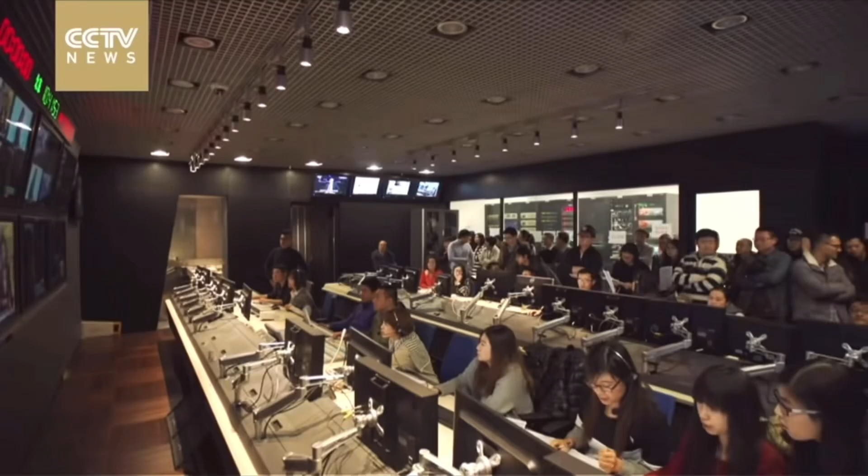This building is the headquarters of CCTV, China's main state-owned television broadcasting network, and is located in Beijing and includes administrative offices, newsrooms, broadcasting rooms, program production rooms, and studios.

At the time, Beijing was undergoing a massive urban redevelopment project ahead of the 2008 Olympic Games, which required a new landmark building. In addition, the existing CCTV headquarters was struggling to keep up with the latest broadcasting technology and efficient operations due to its aging facilities and remote space, and required a new headquarters that would incorporate the latest broadcasting technology, provide a variety of broadcast studios, and ample office space.

The project was therefore undertaken by Rem Koolhaas and his architectural firm OMA. Dutch architect Rem Koolhaas is one of the most influential architects in contemporary architecture, known for his innovative and experimental designs. His major works include the Seattle Central Library, Casa da Musica, and De Rotterdam.

His work often reflects a specific social and cultural context, and he believes that architecture should function as a social phenomenon, not just a building. These characteristics of the architect are also reflected in the CCTV headquarters.

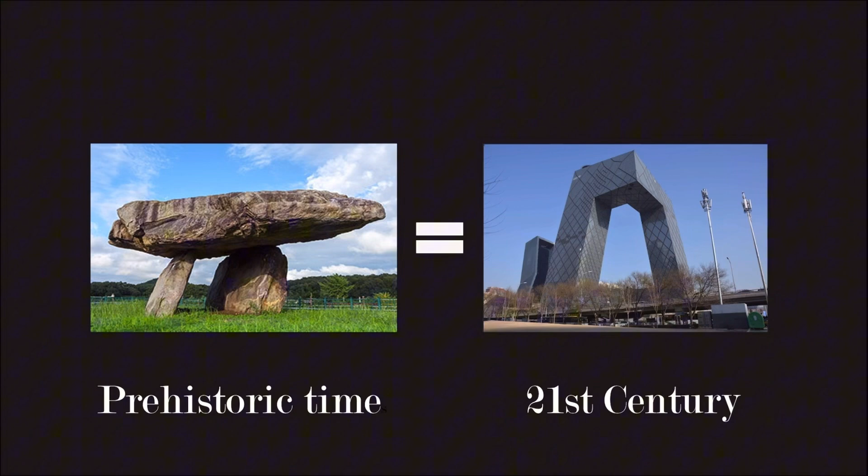The construction of a dolmen required a great deal of labor, and the larger the dolmen, the greater the authority and power of the group. With the CCTV headquarters building, Rem Koolhaas wanted to show the world that China had emerged as a world power through the Beijing Olympics.

And instead of competing for ultimate height and style within a traditional two-dimensional tower that soars toward the sky, CCTV's loop provides a truly three-dimensional experience, culminating in a 75-meter cantilever.

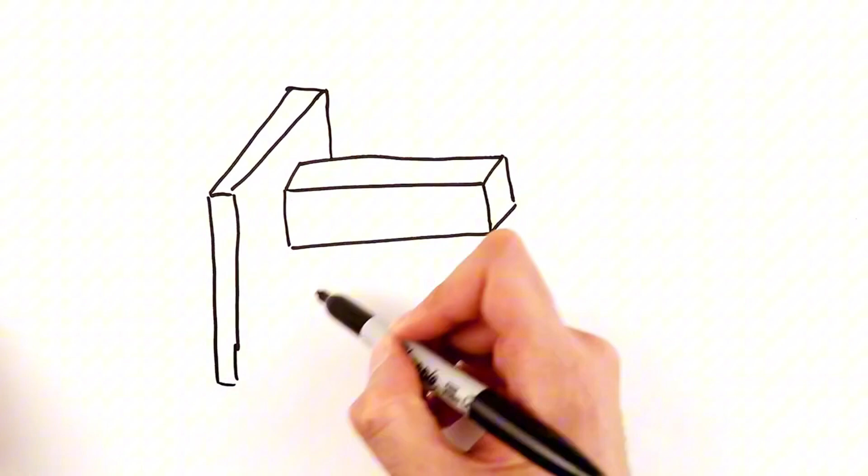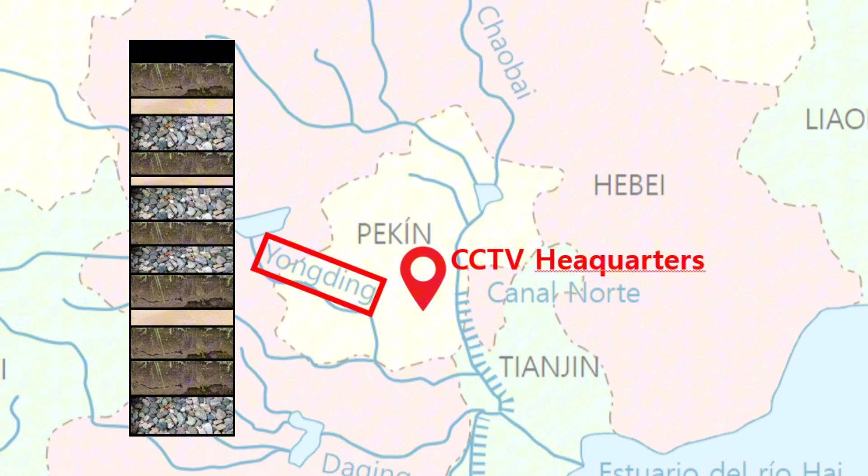However, due to this unique design, structural instability caused by the concentration of loads at one end has to be addressed. In addition, CCTV is located in the central business district of Chaoyang District, Beijing, China, which is located in the middle and lower reaches of the Yongding River, which has weak soils and uneven ground.

Consequently, a piled raft foundation was chosen, followed by the bottom-up construction method, starting from the underground structures and progressing upwards. The process began with a soil investigation to evaluate the ground conditions and determine the optimal locations and depth for the piles. Once this assessment was complete, excavation commenced to reach the necessary depth for a stable foundation.

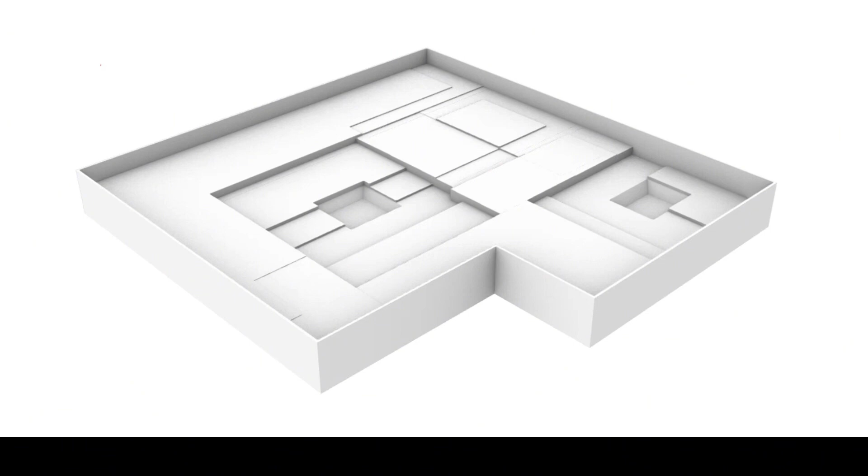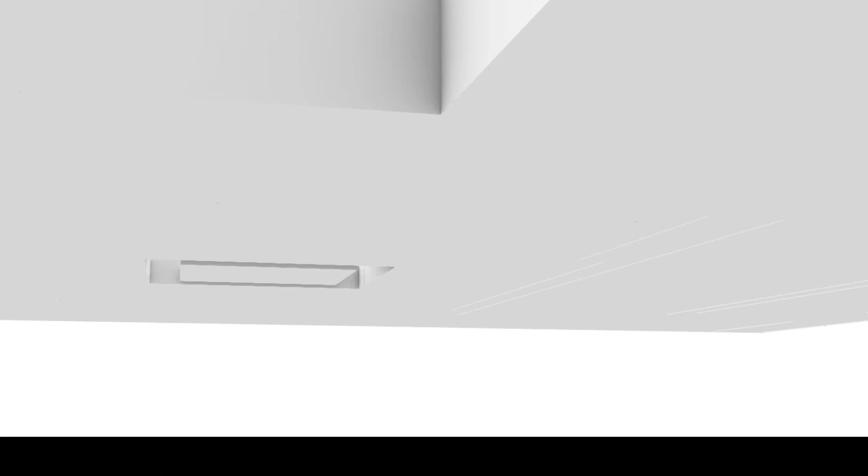During excavation, diaphragm walls were installed to prevent soil collapse and ensure stability. Upon completion of the excavation, piles with a diameter of 1.2 meters and a length of 52 meters were driven into the ground. These piles served to transfer the building's load to deeper, more stable soil layers.

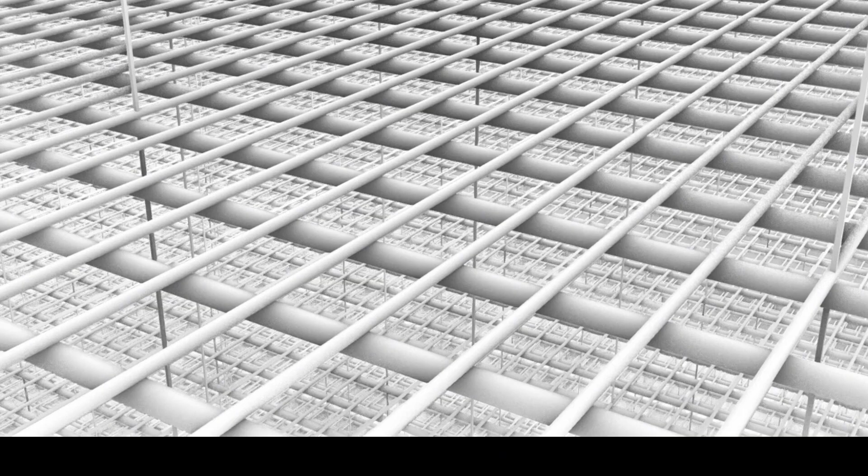Following the pile installation, the raft foundation was constructed atop the piles. The raft foundation works in conjunction with the piles to evenly distribute the entire building loads, mitigating the risk of punching shear failure, which could occur if only piles were used due to their small cross-section area.

After installing the piles, rebar was placed in the raft foundation and concrete was poured. HRB 500 grade rebar was used for the raft, with the lower section reinforced with 2 to 7 layers of mesh and the upper section with 2 to 3 layers of mesh.

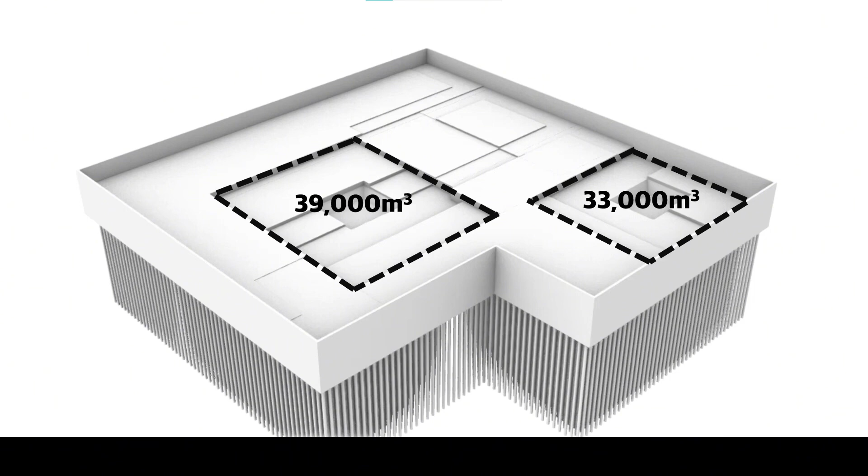The concrete pouring for Tower 1 took 52 hours with a total volume of 39,000 cubic meters. For Tower 2, the concrete pouring took 54 hours with a total volume of 33,000 cubic meters. The total volume of concrete poured for the base plate exceeds 120,000 cubic meters.

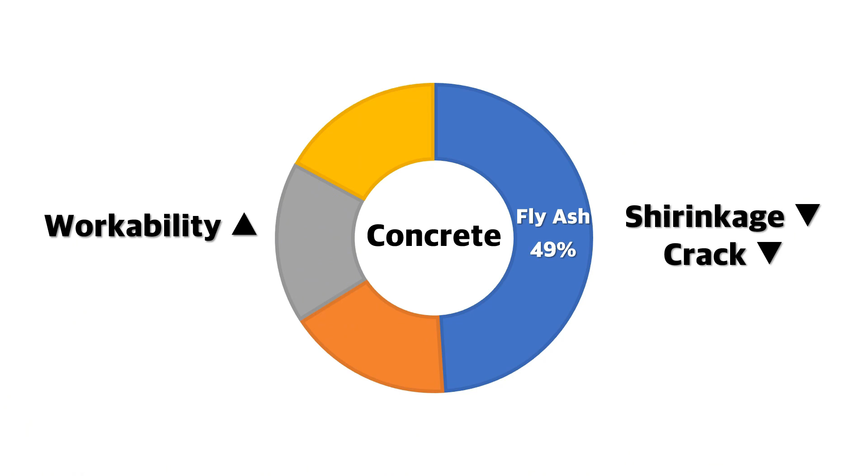During the massive concrete pouring process, crack control is the critical aspect. To address this, CCTV implemented two key methods. The first method involved increasing the proportion of fly ash in the concrete mix to 49%. Fly ash enhances the workability of concrete, reduces shrinkage, prevents shrinkage cracks, and lowers the heat of hydration, thus preventing temperature-induced cracking.

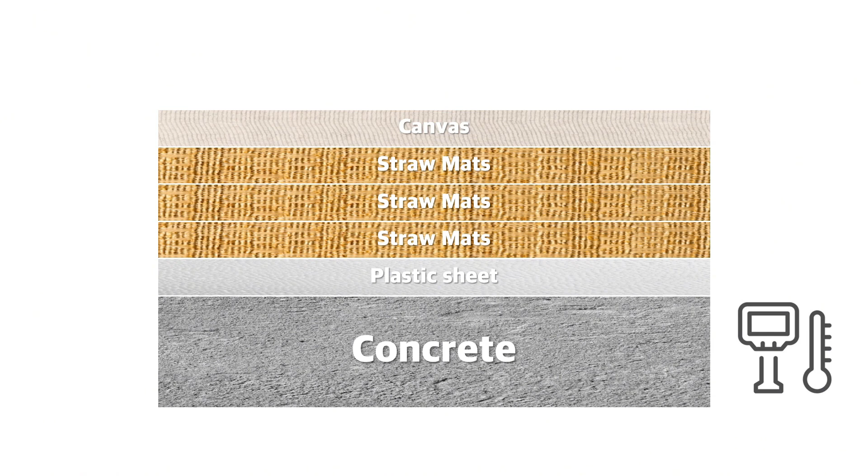The second method included using a combination of plastic sheets, 3 layers of straw mats, and 1 layer of canvas for insulation and maintenance. Additionally, a large capacity concrete computer temperature monitoring system was employed to measure the temperature in real time.

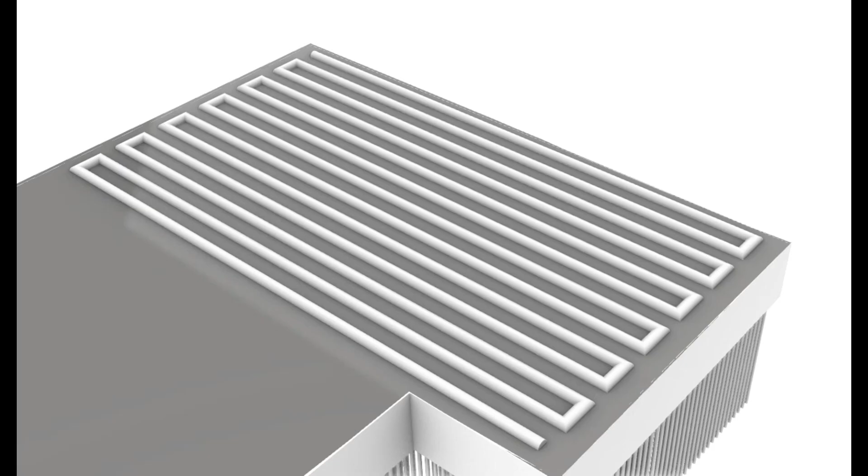Maintaining appropriate temperature and humidity levels while the concrete gains initial strength is crucial for preventing cracks, and this method effectively ensures this. They also used pipe cooling to control internal heat generation during this process. This measure prevented the concrete from cracking and created a solid foundation.

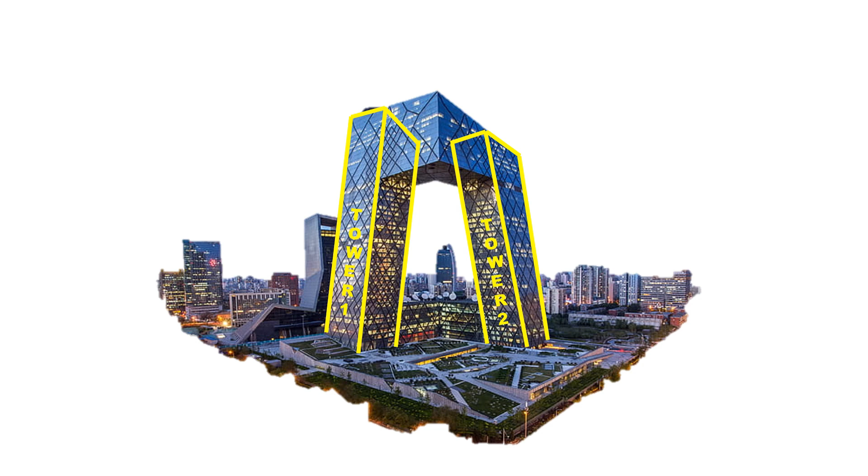The cantilevered portion of the CCTV required a different construction process from that of a conventional two-dimensional skyscraper. Therefore, ARUP considered a total of 3 methods to construct the cantilever. The first method considered was the temporary tower support method.

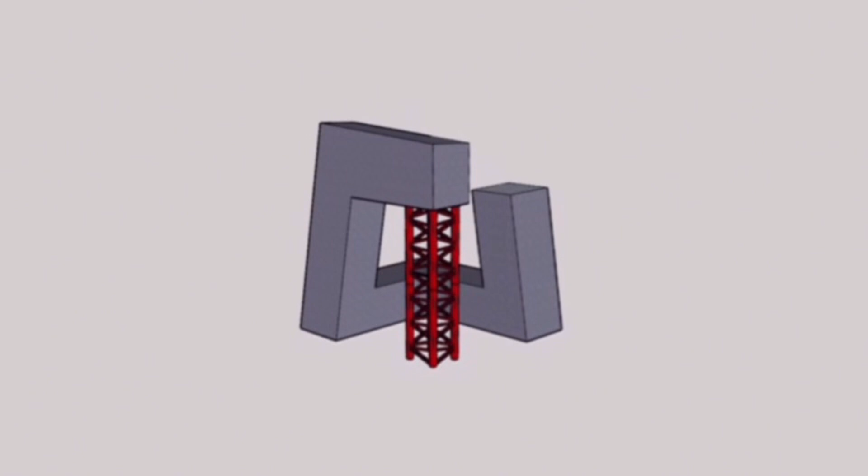This method uses temporary towers to support the structure while the cantilever of the building is constructed. This temporary tower provides the necessary support until the cantilever has achieved structural stability on its own. After that, the temporary tower is removed. For example, thin and long structures cannot resist bending moments on their own, so this method is used not only in bridges but also in buildings with long and thin structures.

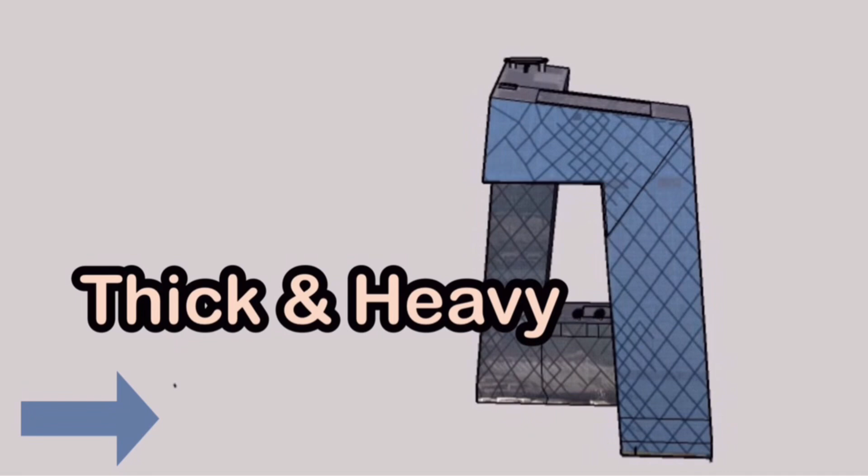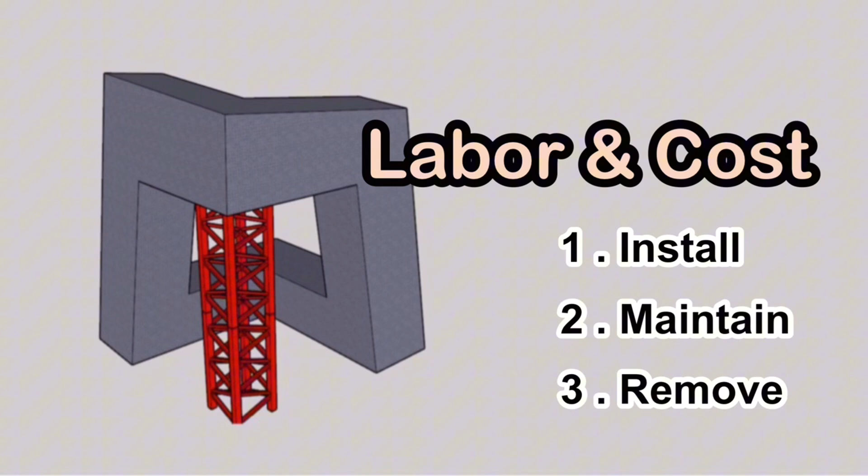However, in the case of CCTV cantilever, it is very thick and heavy, so there is a problem that it requires a strong and large temporary tower that can withstand a large load. Designing a temporary tower that could withstand a large load was not easy in itself, and even if designed, a lot of labor and cost were required to install, maintain, and remove the temporary tower, so a method other than this method was needed.

The second method considered is the lift-up prefabrication method. In this method, the cantilever portion of the building is manufactured in a factory as large-scale modules, which are then transported to site and installed using a crane. Only assembly work is mainly performed on-site. This method has the advantage of significantly reducing on-site work time and ensuring quality because the modules are manufactured in a highly controlled manufacturing environment from external conditions such as weather.

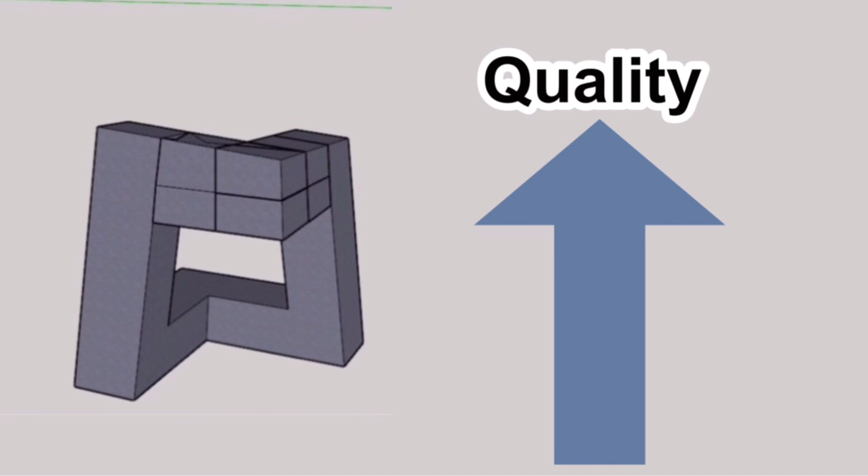The Umeda Sky Building's floating garden is a representative example of construction using a method of manufacturing modules and then lifting them. This building is located in Osaka, Japan, and is especially famous for the floating garden located at the top, a characteristic structure that connects two towers. The Umeda Sky Building floating garden consists of an observation deck and a relaxation area for visitors. It was suitable to use prefabricated modules because the internal structure was relatively simple and did not require additional heavy or

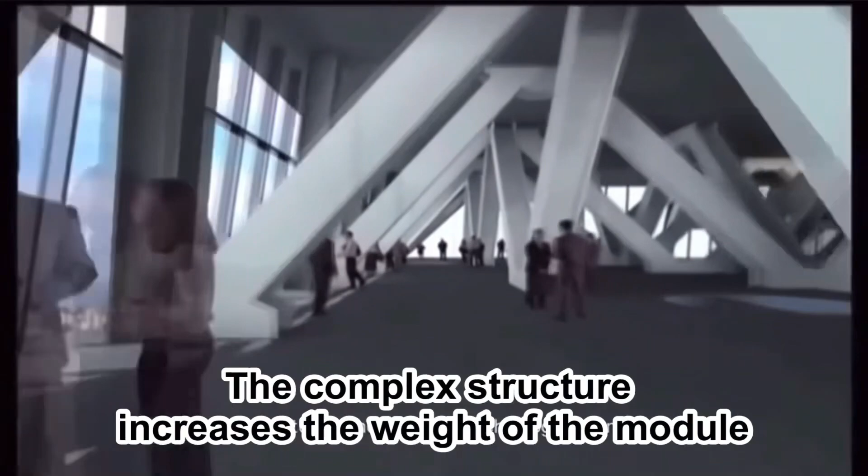complex equipment. However, in the case of the CCTV headquarters building, the cantilever part is structurally complex because it accommodates the broadcasting studios and offices. This results in increased costs and technical difficulties in module production. Additionally, the complex structure also increases the weight of the module. This causes additional problems: the transportation cost of moving modules from the factory to the field has increased, and the process of lifting and assembling heavier modules has become much more difficult. So which method was adopted to solve the problems of the first and second method?

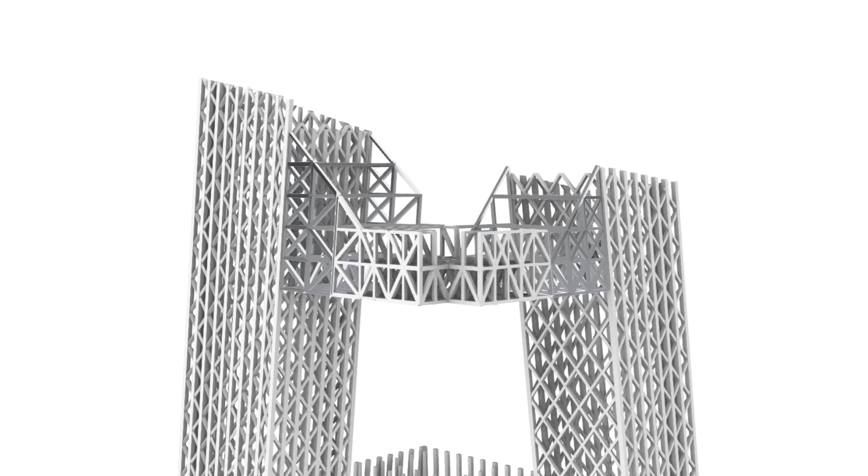The method ultimately adopted for cantilever construction of the CCTV headquarters building is the balanced cantilever method. First, let's check the process of this method through a 3D modeling that we created ourselves. As you can see, during cantilever construction, a horizontal member is supported through a diagonal member and construction of two independent cantilevers is carried out. In this process, the lowest part of the cantilever meets first, and then construction of the remaining part proceeds.

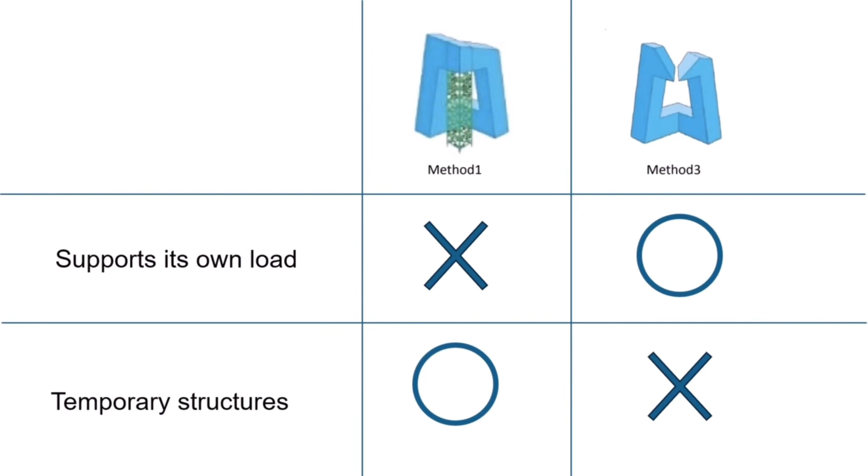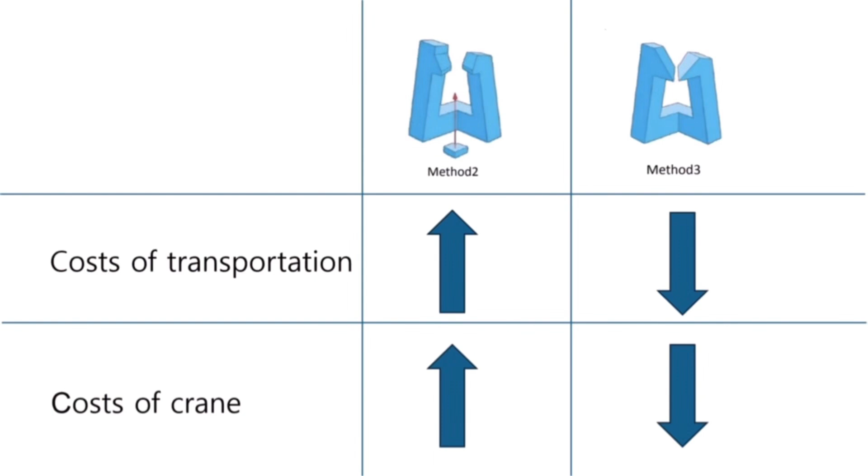This method is easy to adjust on site and can more accurately meet the design requirements of complex structures through a gradual construction process. Additionally, because it supports its own load, much less temporary structures are used compared to method 1, and because both cantilevers are constructed on site at the same time, it takes less time and costs less in terms of transportation and crane operations than lifting complex and heavy modules using method 2. In other words, we were able to solve the problems of the first and second method by conducting construction using the balanced cantilever method through accurate calculations.

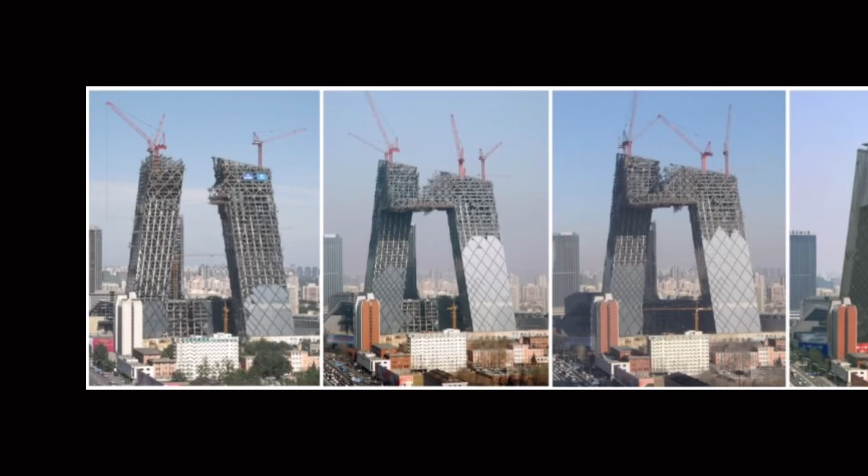However, challenges remain to be addressed with this approach. If constructed this way, the two cantilevers must engage exactly in the center. However, the metal members used during construction have distinct thermal expansion and contraction effects which generate stress. This is the main factor stopping the two cantilevers from meeting exactly in the center. Let's take a look at how this problem was solved.

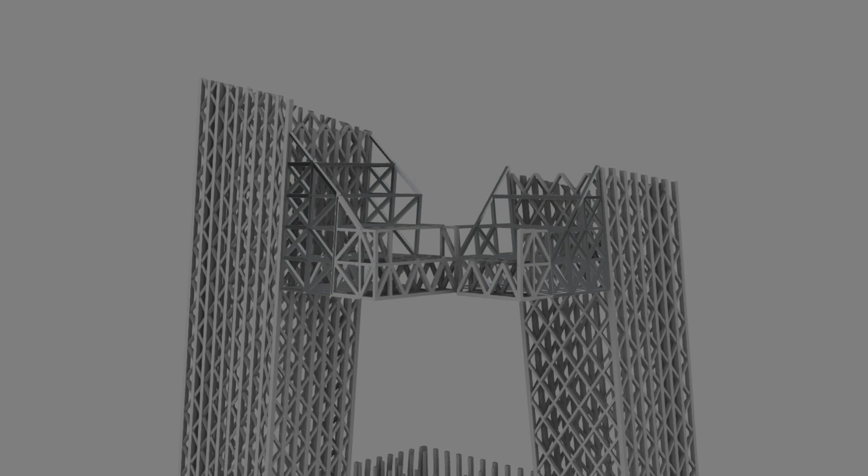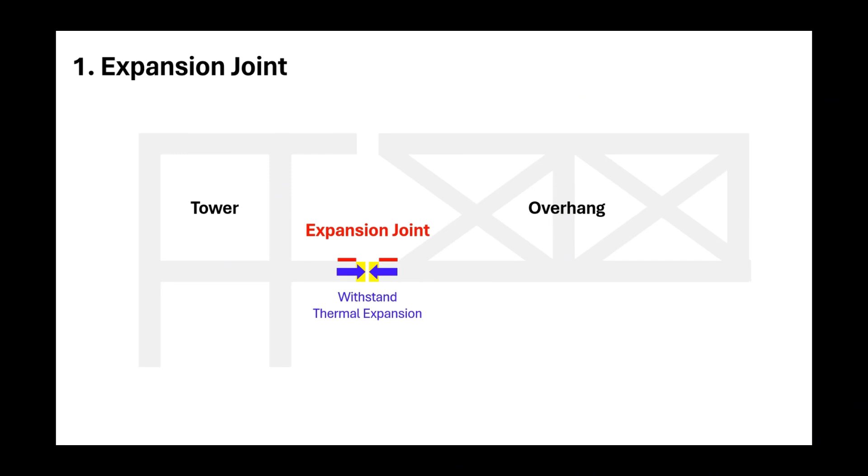First, in order to effectively manage these thermal expansions, contractions, and stresses, and to achieve optimal structural alignment, expansion joints were used to connect the tower and cantilever. Expansion joints provide the necessary flexibility at the connection points of structures during construction, allowing them to withstand expansion and contraction due to temperature changes. This plays an important role in minimizing the negative impact of heat-induced deformation on structure stability.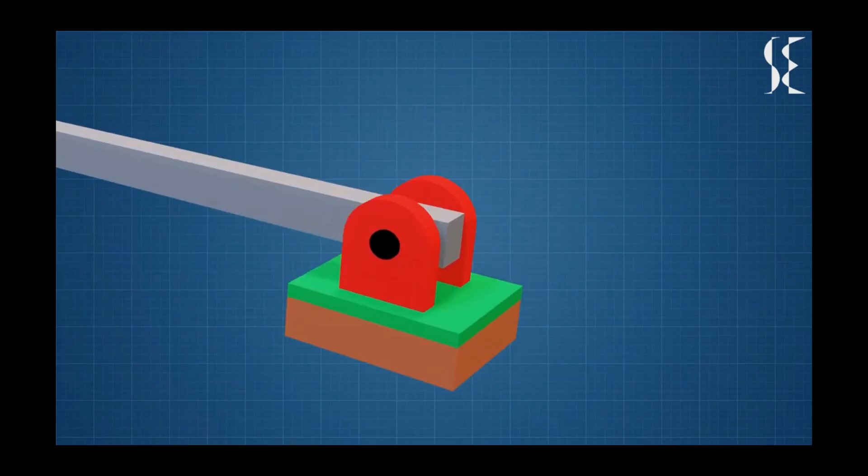Additionally, when the cantilever structures extending from both sides meet in the center, they are connected through 7 links. This connection was made by a pin joint. Pin joints allow rotation of members but limit horizontal or vertical movement. By connecting the 7 links with pin joints, each tower is designed to respond independently to loads by supporting it horizontally and vertically but also allowing rotation.

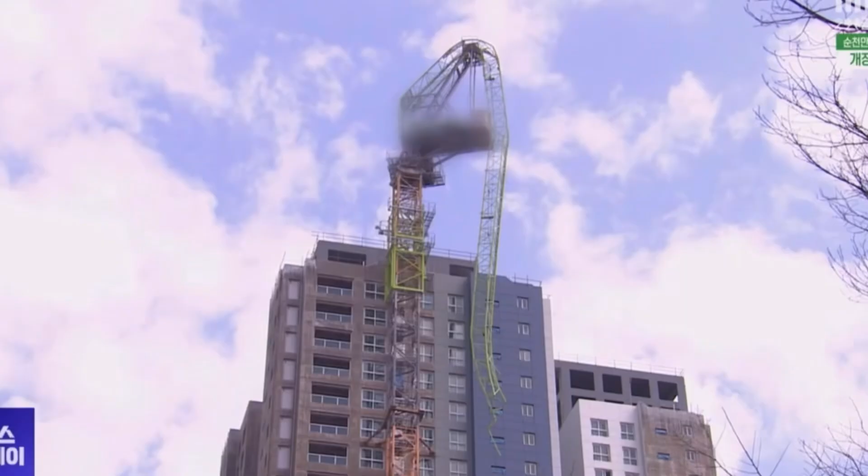When constructing high-rise buildings or complex structures, wind can be a big variable. Wind places additional dynamic loads on structures and can affect the safety of construction equipment such as cranes. Therefore, construction of the CCTV headquarters building was carried out in the morning and on a windless day to minimize movement of the structure and ensure maximum construction precision.

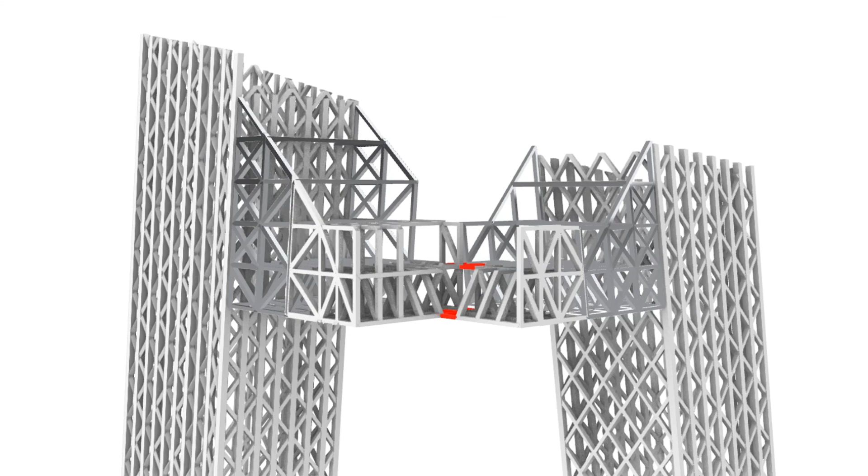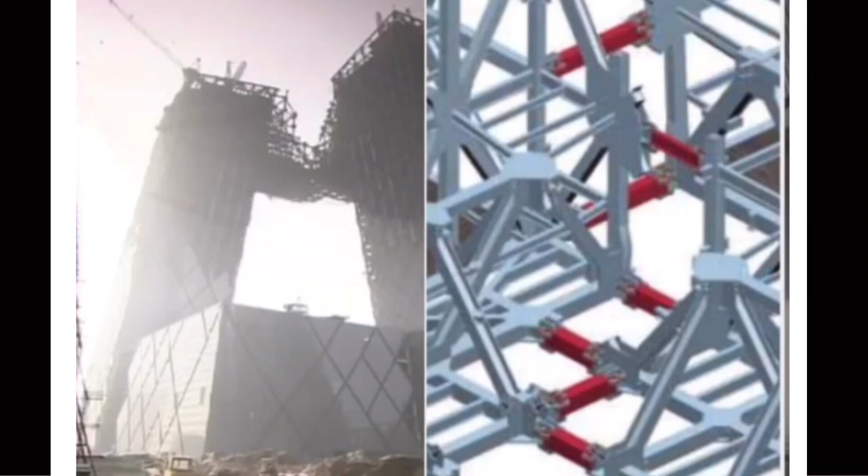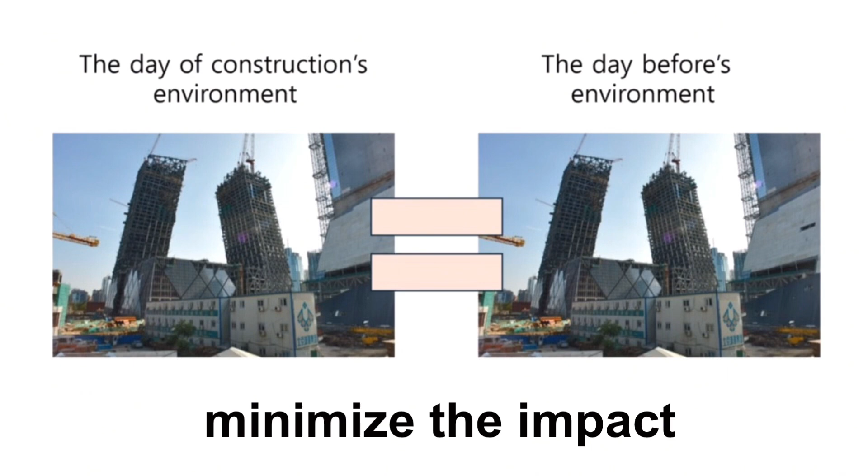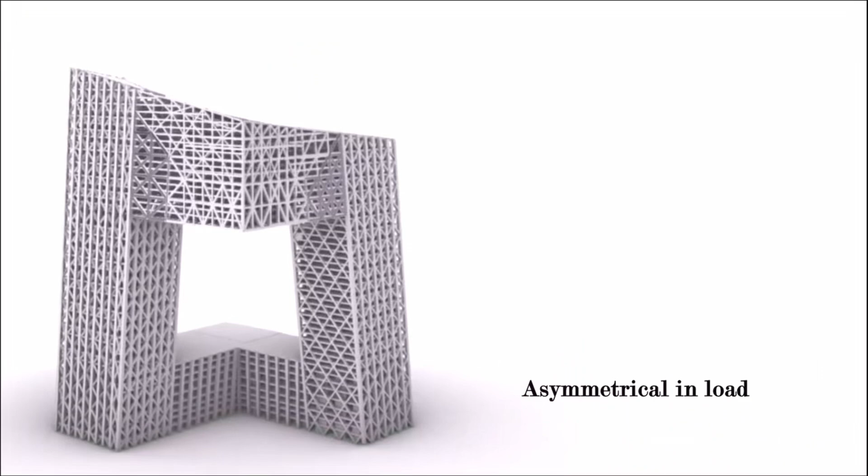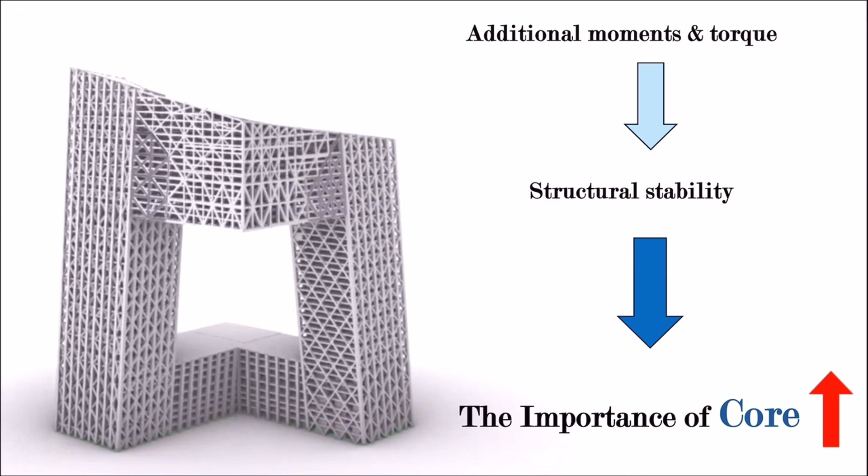Tilted buildings, especially those shaped like the CCTV headquarters building, are inherently designed off the vertical axis, resulting in an asymmetrical distribution of loads acting on the building. As a result, these asymmetrical loads generate additional moments and torques due to the effects of gravity. This directly affects the structural stability of the building, making the role of the supporting core even more critical than in a typical building. The tower part of CCTV headquarters has a 6-degree tilted shape.

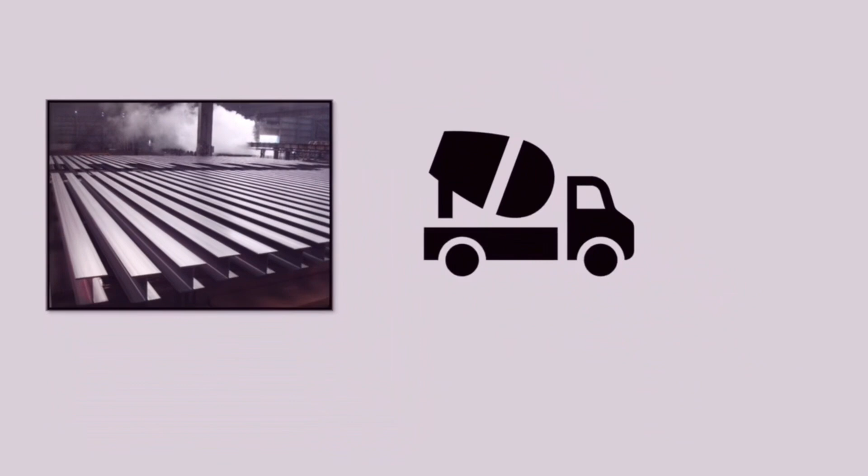OMA considered the tilted core structure to reflect this tilted shape in the initial design stage to maintain a consistent planar arrangement. However, the tilted core structure has some problems. First, tilted cores resulted in asymmetric load distribution, making it difficult to secure structural stability. This led to the generation of additional moments, resulting in the need for more special materials such as steel and high-strength concrete than typical vertical cores. These special materials contributed to a significant increase in the overall construction cost.

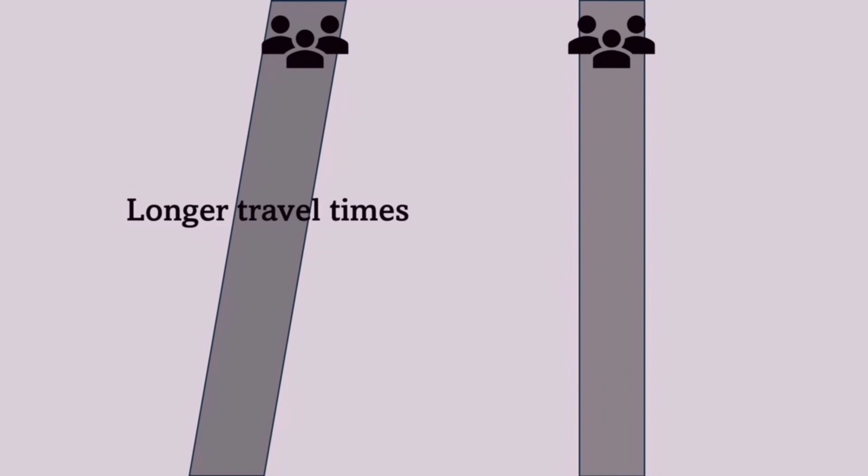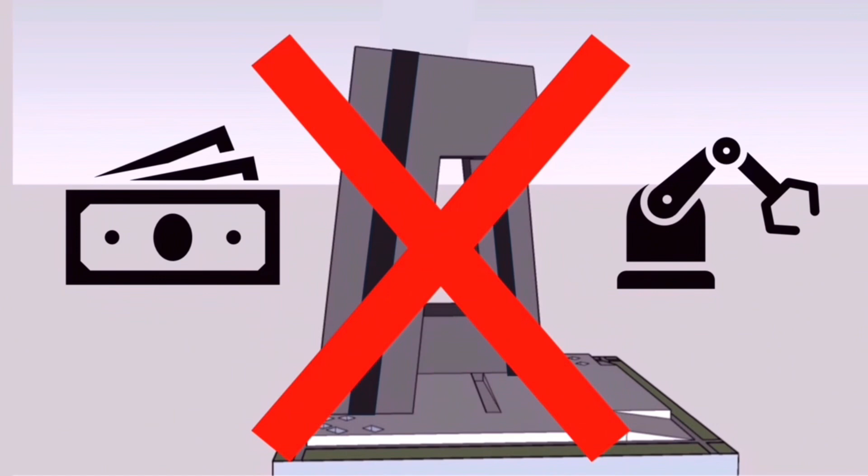Second, when the elevator's travel path was oblique, the passengers' travel time was prolonged and the elevator's operational efficiency decreased. In addition, the technical complexity of the elevator system also increased, adding difficulties to operation and maintenance. Eventually, these rising costs and technical limitations abandoned approaches using tilted core structures. What form of the core did ARUP and OMA solve the tilted form of the building with instead of the tilted core? To create a unique shape, the CCTV headquarters keeps the outer tube structure in an inclined shape, while the core is designed vertically.

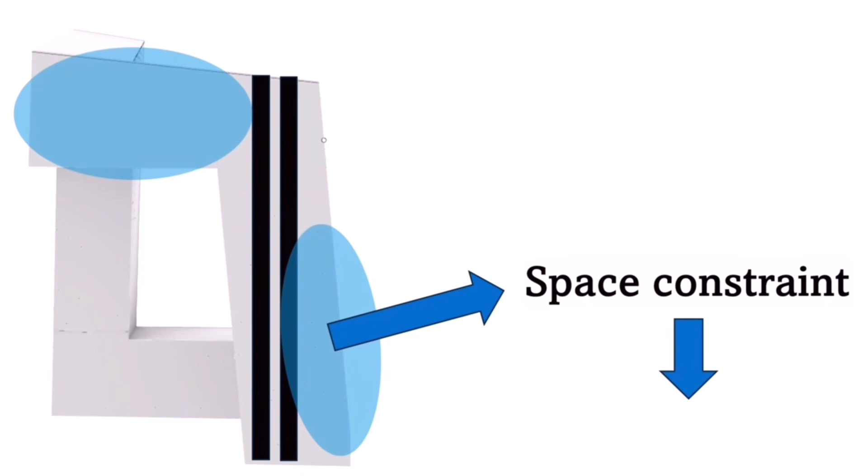However, if one vertical core is used here, like other buildings, the tilted structure limits the space where the core can be located. The importance of the core grows further in tilted buildings, which can lead to structural instability. To address this issue, instead of placing one vertical core, they chose to place multiple vertical cores at various heights according to the degree to which the building is tilted. As a result, 7 vertical multi-cores with different heights were placed in the CCTV building. In particular, the tower core, bottom core, and cantilever core were properly placed, respectively, as the core is the main factor supporting the load applied to the overhang structure.

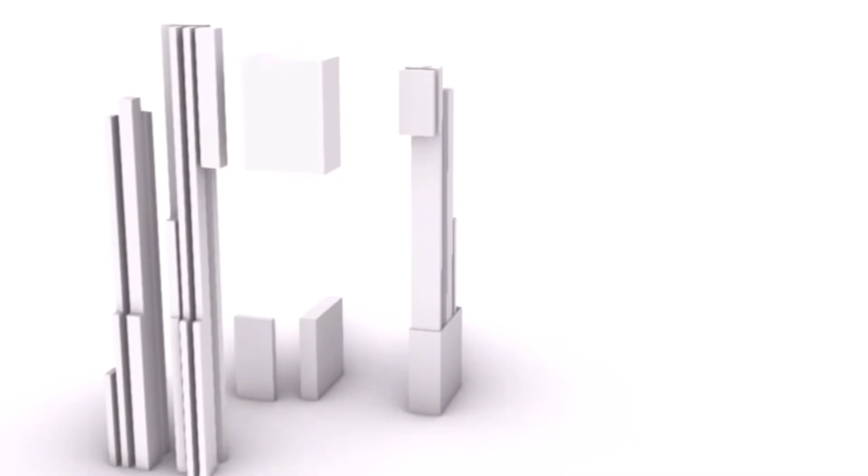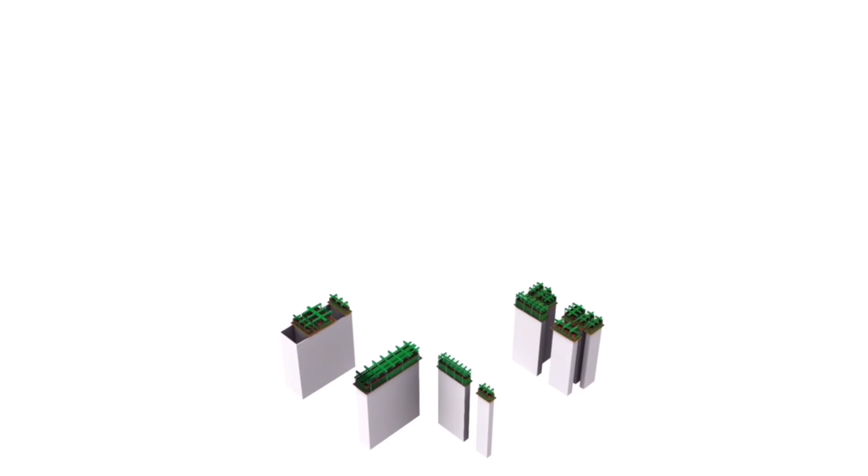In this process, an auto-climbing system was used for construction workability when placing concrete on the outer wall of the core. Since the cross-section of the core is not constant, a new formwork was needed to adjust to the changes in each cross-section. Therefore, in the part where the cross-section of the core changes, a flexible climbing formwork system was applied that disassembles the formwork and reassembles it according to the cross-section. Each of these cores was designed to efficiently integrate elevators, stairs, air conditioning systems, and power and data wiring.

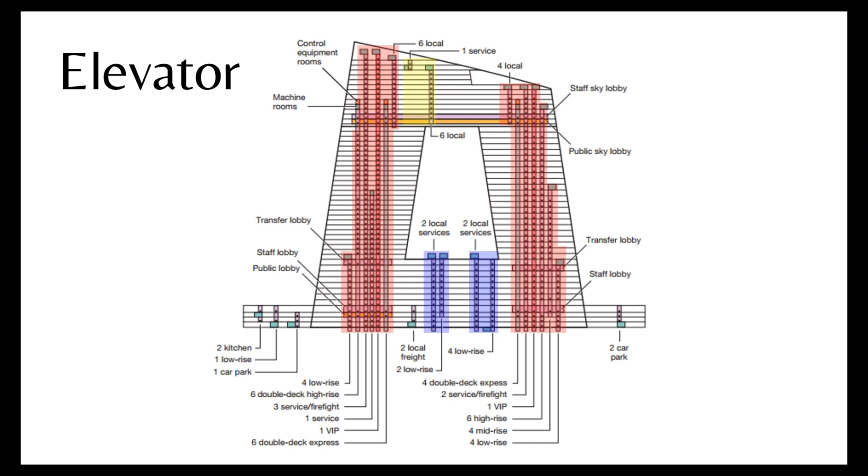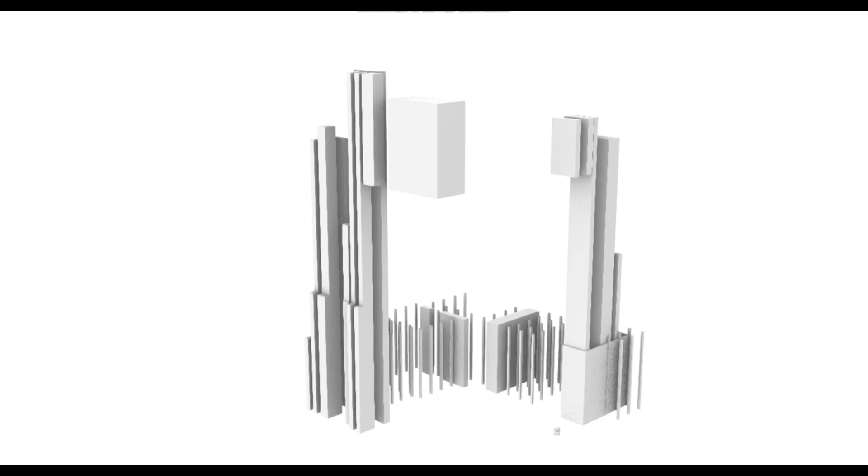All staircases are integrated within the central core, providing safe evacuation routes in case of fire or emergency. The escape routes are designed for quick access to staircases from each floor and are used in certain areas in parallel with elevators. The tower side core is fixed to the ground. Lateral loads are fatal. Especially in the CCTV building, there was a core without footings in the cantilever part, which required further consideration. So, what method could have been used to solve this problem?

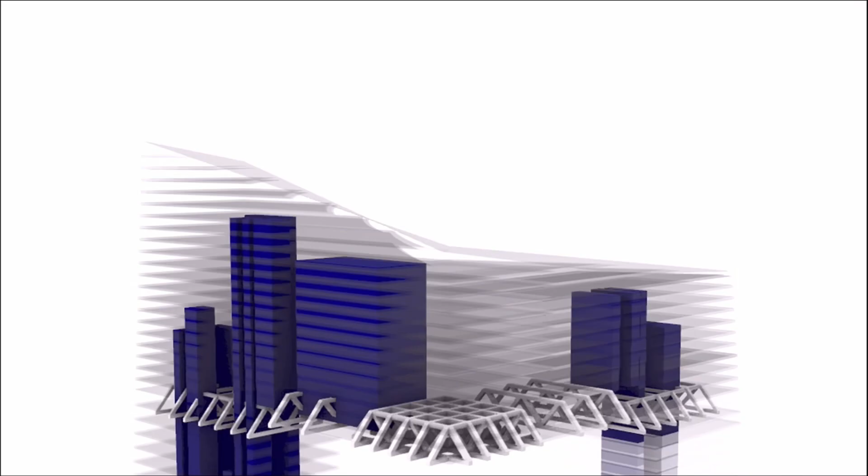The answer was to install the transfer truss, which acts as an outrigger. The outrigger system connects the core to a mega column or wall, reducing the moment of the core and holding the displacement. In the CCTV building, they connect the cantilevered core to the exoskeleton in the form of a truss. The exoskeleton of CCTV is a diagrid structure.

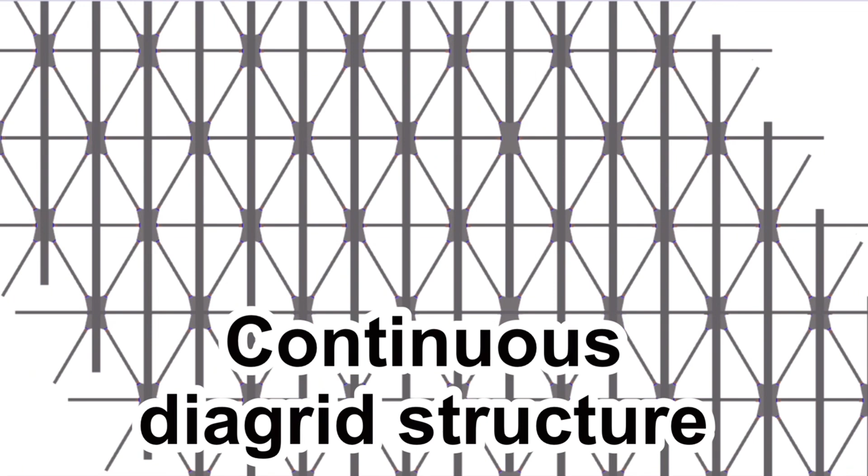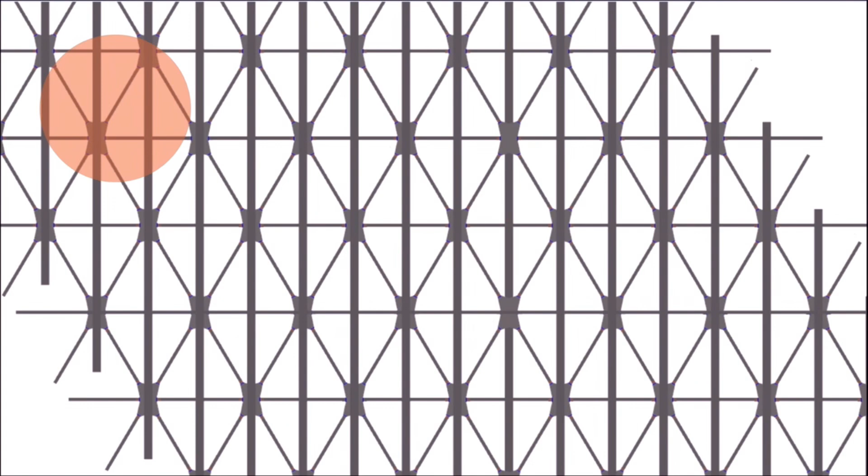Unlike a regular diagrid, the diagrid is not laid out in a regular pattern, but laid at different angles to suit the optimal angle of each section, and more tightly spaced in areas of high stress. The continuous diagrid structure, connected by butterfly nodes, also acts as a continuous loop throughout the CCTV building, allowing stresses in a particular section to be distributed throughout the building. The diagrid structure also allows loads transferred to the transfer trusses to be distributed throughout the building.

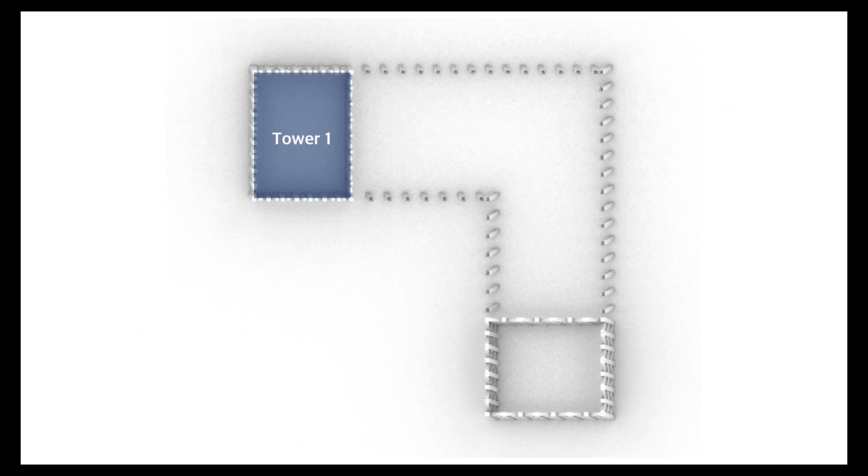This design allowed the CCTV building to retain its unique leaning form while providing an efficient and safe internal structure. So how were the members lifted up in the process? The members used for CCTV were lifted through a tower crane. The work area was divided into three areas: Tower 1, Tower 2, and Podium.

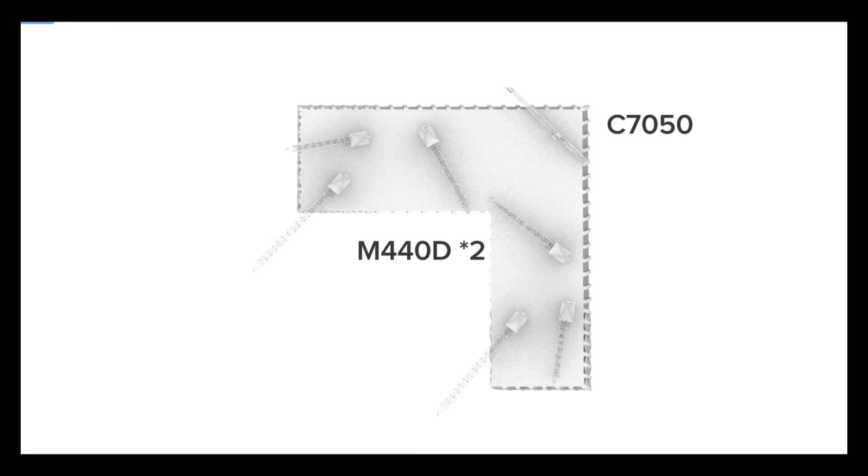Tower 1 and Tower 2 were placed with one M1280D tower crane and one M600D tower crane each, and Podium has two M440D tower cranes and one C7050 tower crane, which used a total of 7 tower cranes.

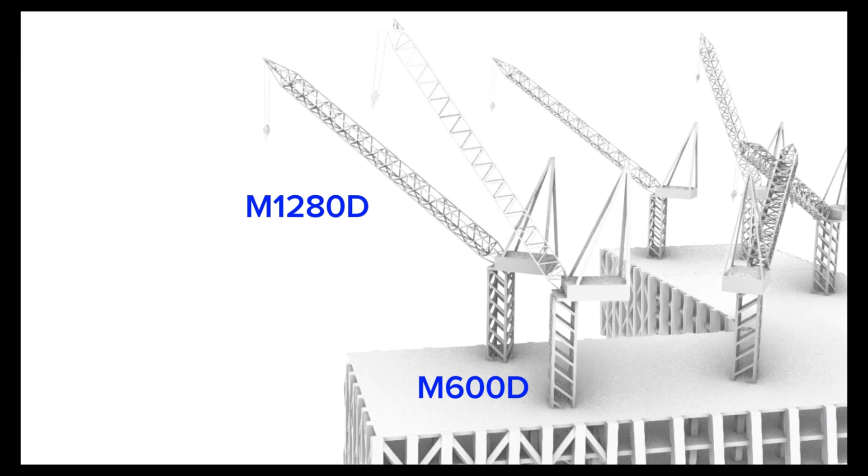The high-rise part of Tower 1 and Tower 2 were equipped with a large tower crane M1280D with a lifting capacity of hundreds of tons, and a medium and large tower crane M600D with a capacity ranging from several tens to hundreds of tons. These cranes had the ability to safely lift heavy components even at high altitudes.

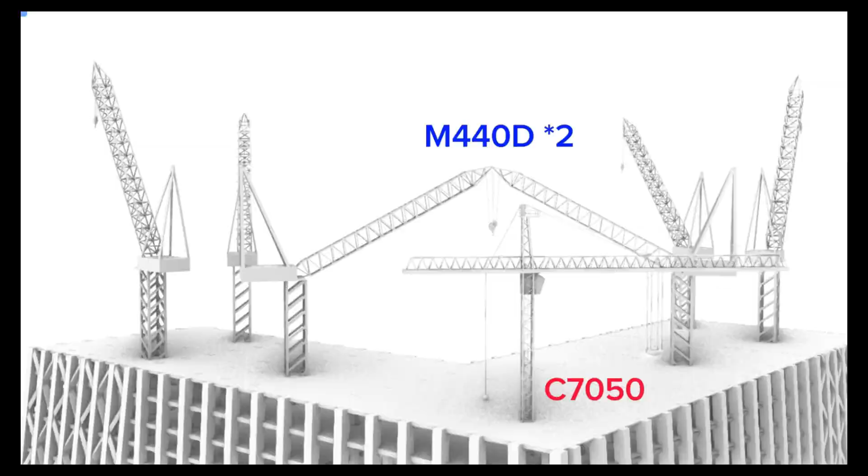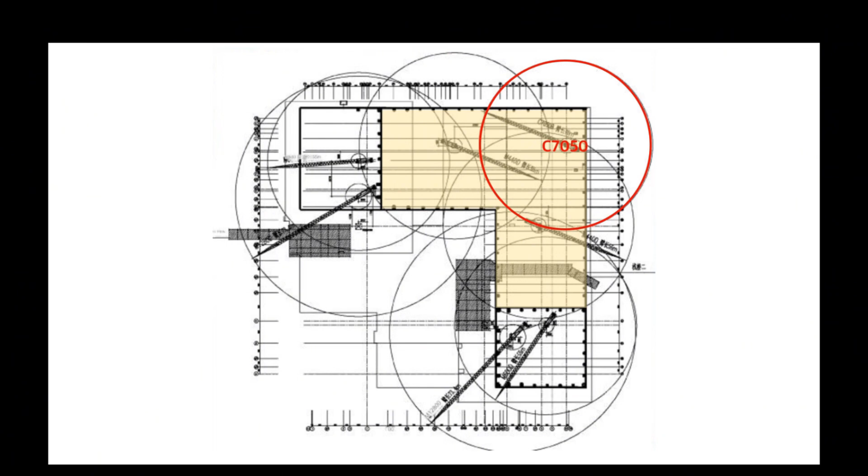Since there was a lot of work in the Podium section that required high accuracy at relatively low heights, two medium-sized tower cranes M440D with lifting capacity of several tens of tons were deployed. Due to the limited space in the Podium section, the C7050 crane with a wide working radius was placed at the center and two medium-sized cranes M440D were placed on both sides of the podium to efficiently utilize the space.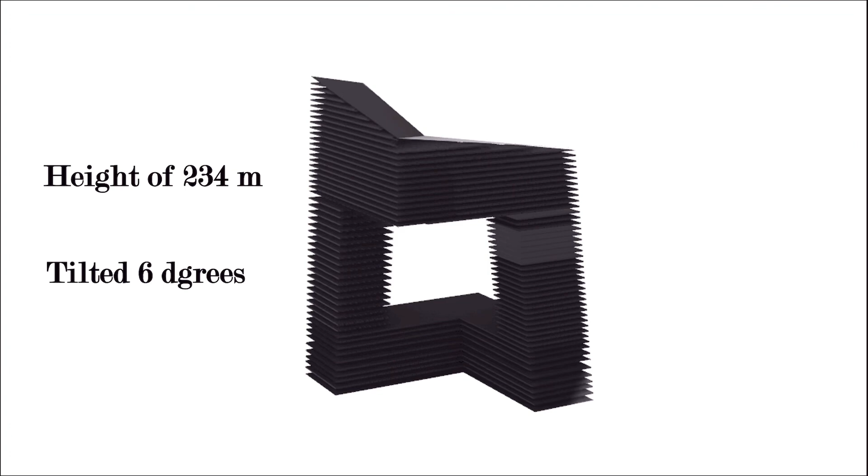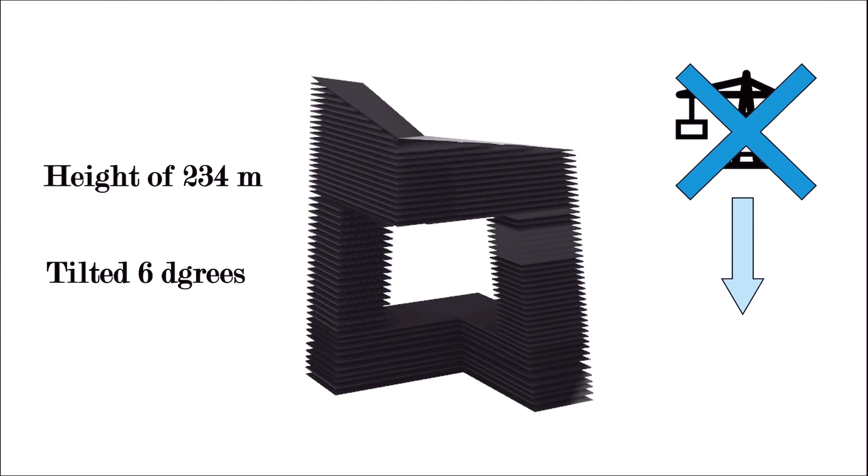However, since the CCTV headquarters building is 234 meters high and the tower part is inclined at 6 degrees, it was not possible to use the method of building the building with a tower crane moving vertically. Therefore, the CCTV headquarters building adopted the method of building the building with two tower cranes. 1. Install tower cranes 1 and 2 on the ground. 2. As the height of the building increases, the cranes move vertically.

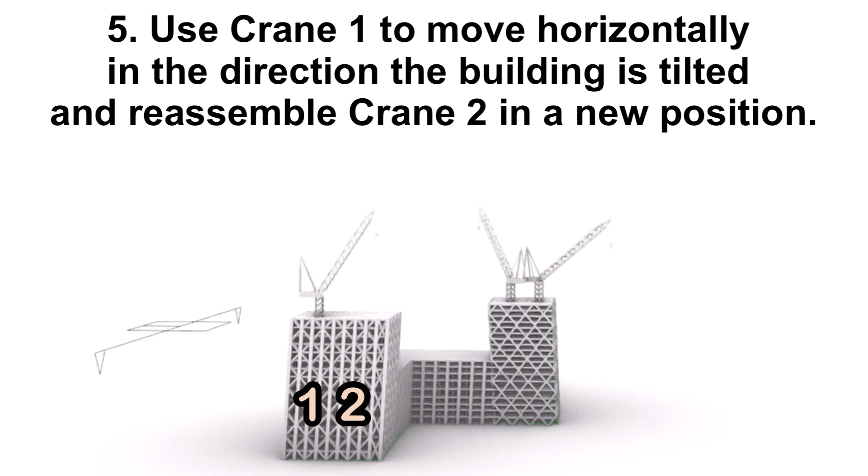3. As the building rises due to the 6 degrees tilted tower, crane 2 cannot reach the end of the building due to the limit of horizontal distance. 4. Therefore, crane 1 is used to dismantle crane 2. 5. Use crane 1 to move horizontally in the direction the building is tilted and reassemble crane 2 in a new position. 6. Crane 1 and crane 2 resume working again. 7. The process involves a total of 14 horizontal movements and 4 vertical movements. In this way, the construction of the tower part of the CCTV was completed.

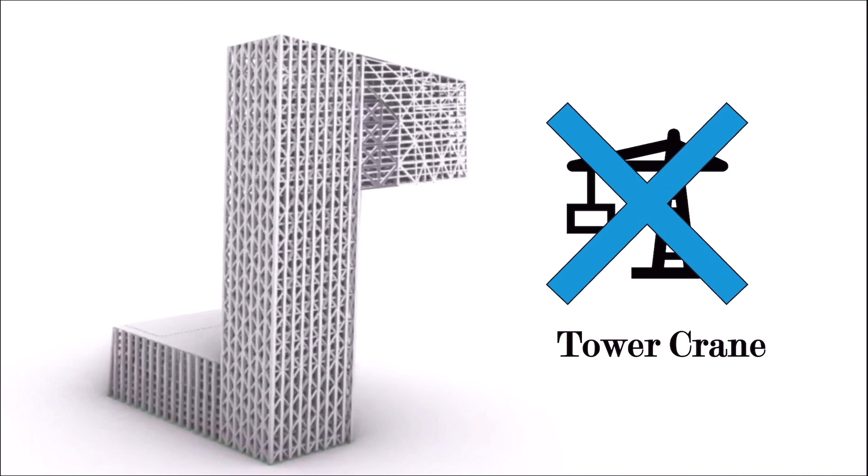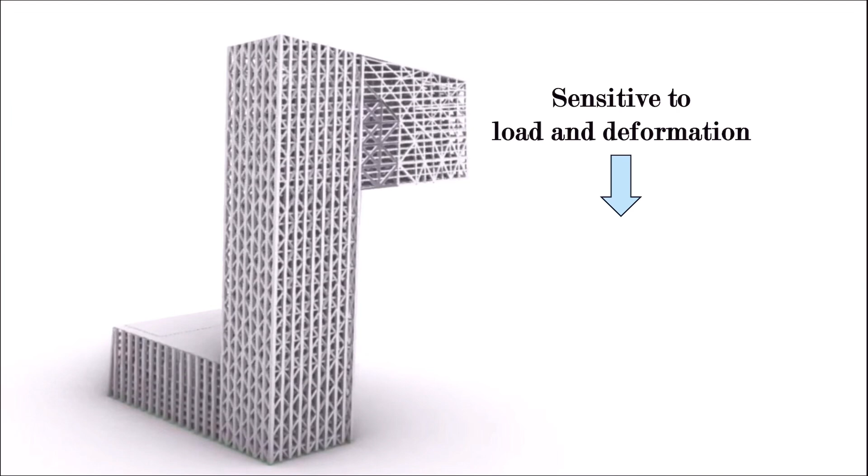However, since the cantilever structure extends significantly from the center of the building, it was not possible for the tower crane to procure it directly. The construction of the cantilever structure was more sensitive to loads and deformations than other parts of the building, requiring high precision and stability, which is why hanging cranes were used.

The type of hanging crane used in the construction of the CCTV headquarters was a derrick crane, which is installed on the side of the building and is very flexible. It can be moved and reassembled as required, with all the necessary members for the cantilevered part procured and installed in the exact location.

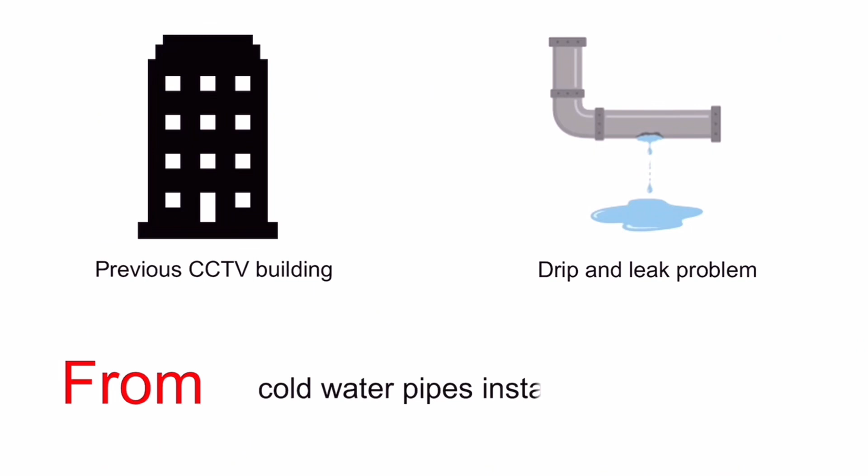In previous CCTV buildings, drip and leak problems occurred where water droplets fell from cold water pipes installed above the ceiling. This was a big problem because even a small leak could cause fatal damage if it touches broadcasting equipment, due to the nature of the broadcasting station.

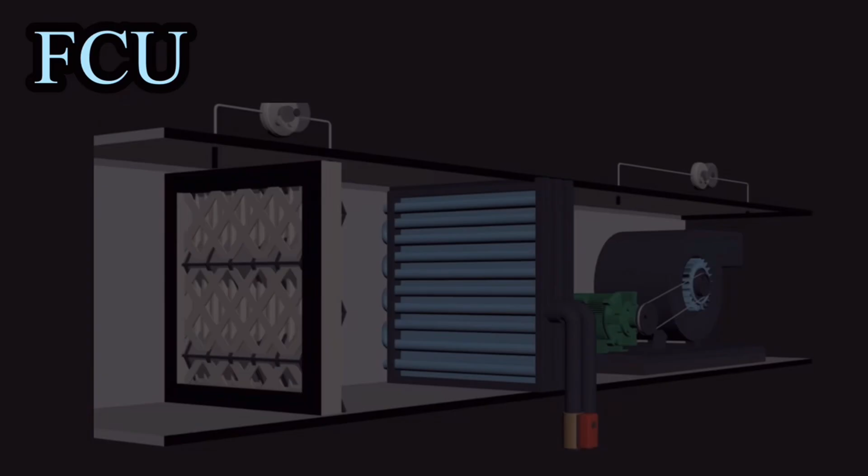In addition, the previously applied fan coil unit had a problem that it was difficult to respond to structural changes in buildings or changes in use, unlike the characteristic of a broadcasting station where the use of each studio can be changed frequently. Therefore, a variable air volume system has been introduced in the newly built CCTV headquarters for the following reasons.

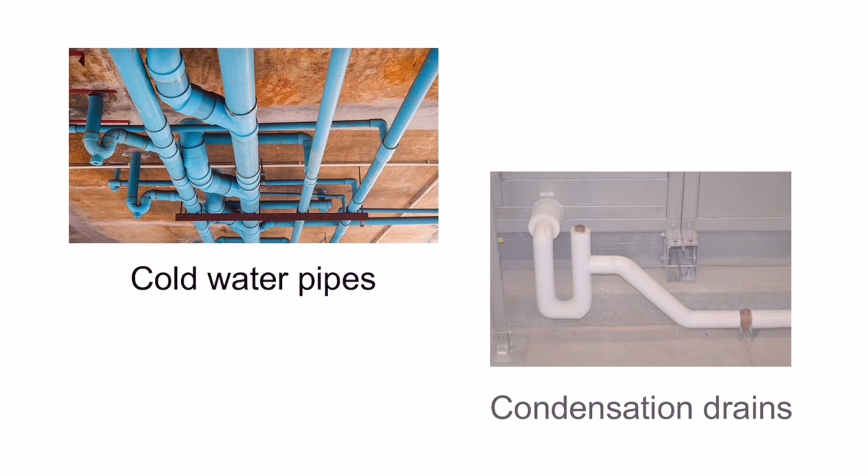VAV systems do not install cold water pipes or condensation drains above the ceiling, which greatly reduces the risk of leakage. This is critical in environments with many sensitive electronic equipment, such as broadcasting equipment. VAV systems provide cooling through airflow, thus preventing this risk of leakage.

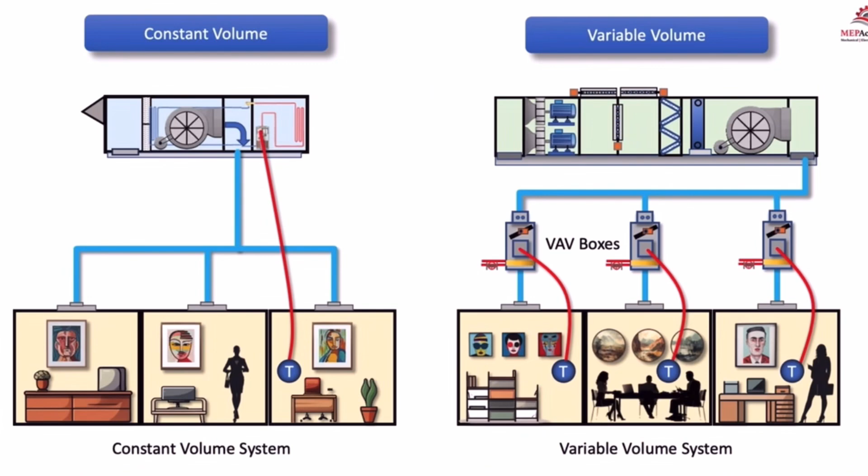Outside air can be used for cooling by utilizing the low temperatures of winter and autumn in Beijing. The VAV system can reduce energy consumption and operating costs by introducing this cold external air indoors and utilizing it for cooling. The VAV system provides high flexibility by allowing airflow to be controlled in each zone.

When a studio in a broadcasting station is repurposed or a new zone is added, the VAV system can be easily reconfigured to provide the necessary cooling and heating. This enables space optimization.

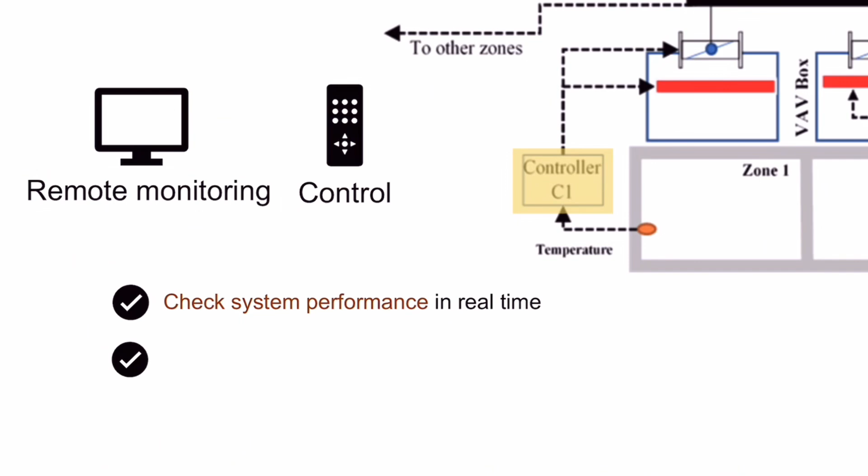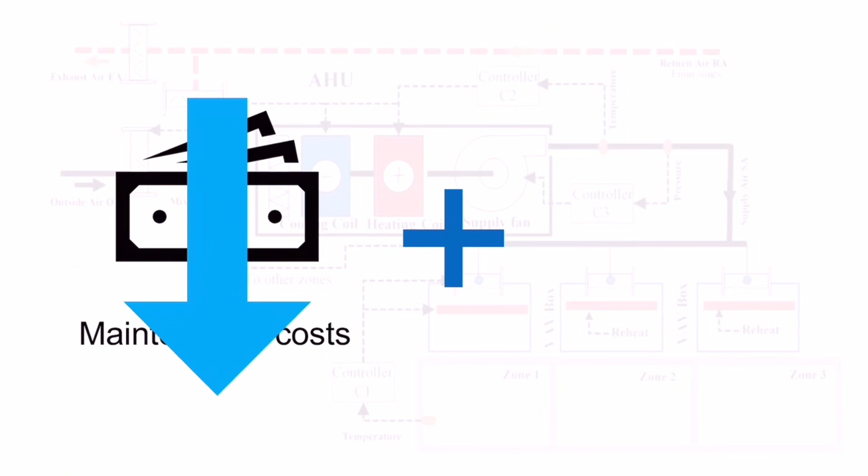An intelligent controller enables remote monitoring and control of VAV systems, which can check system performance in real time, respond immediately in the event of an abnormality, and manage maintenance tasks efficiently. This reduces maintenance costs and improves system stability and reliability.

In conclusion, we introduced a VAV system at CCTV headquarters to enable the protection of broadcasting equipment, energy saving, flexible operation, and efficient maintenance.